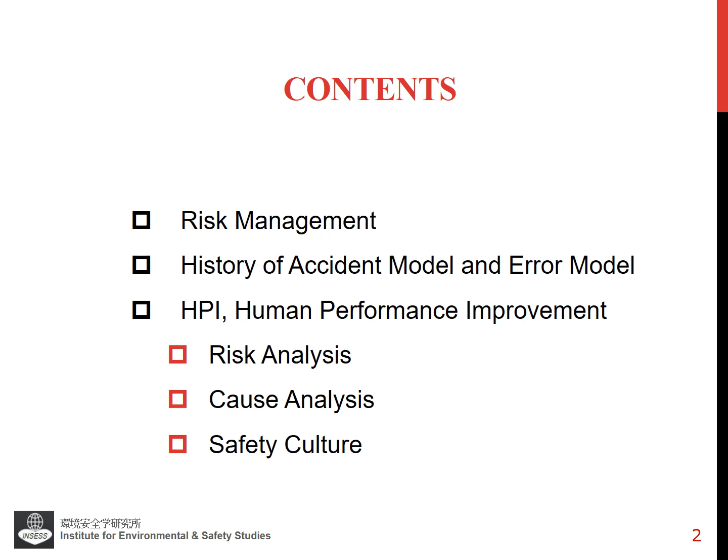What is risk management? An inflexible or unchangeable organization is clearly supposed to include fatal risk in the system and the current highly and fast developing situation, no matter what its size is. It means that any system doesn't reach the best result whatever behavior is done, being not adjustable for risk reduction due to variety and change in the system design or the organization decision making.

Namely, the key for the most rational optimization along with keeping the development is actualized by using risk management adjustable to all organizations or systems, to solve the complicated issues in the current fast-changing international situation. The point of risk is that local optimization would make the entire worst of the system. Well-balanced design and operations are required.

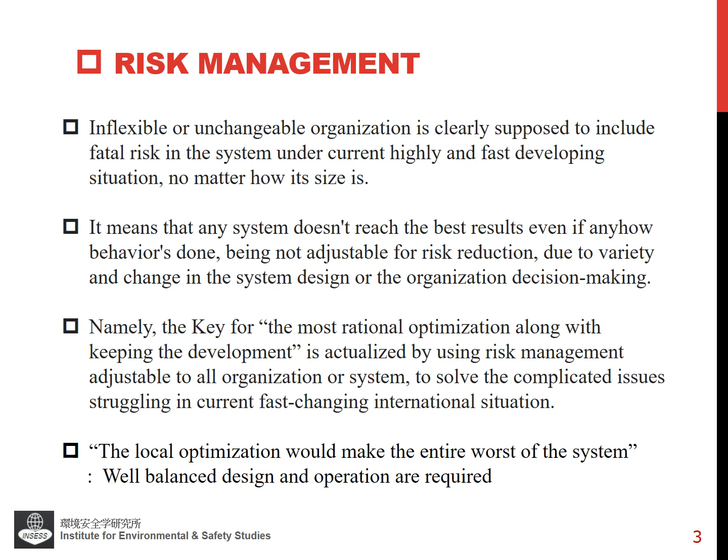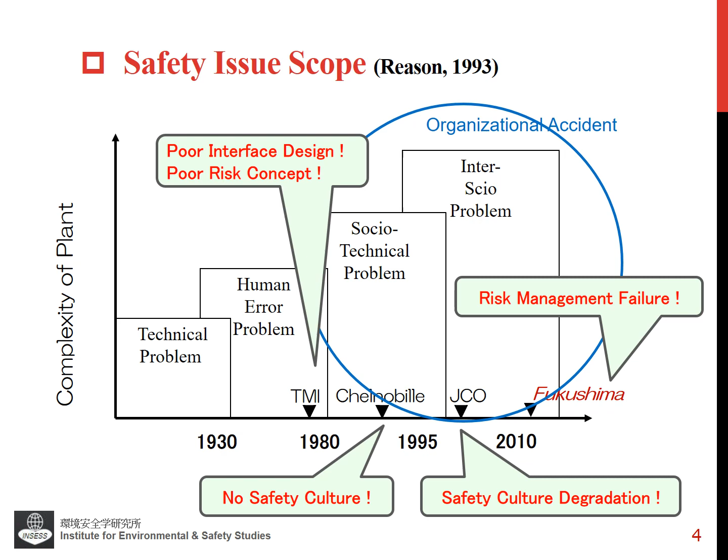Safety issue scope is shown here. As time passed, the plant system became larger and more complex, and the problems are completely different as time passed. The problem first caused on plant systems was technical problems from 1930 onwards, and then the problems moved to human error problems, and then socio-technical problems and inter-social problems had been actualized. So right now, we must consider the organizational accident.

This shows the accident scope change as time passed. Accident models and error models would change as time passed. The first recognized accident model is the so-called domino model or chain model. This is the basic one in accident models. We can do cause analysis. So the management countermeasure is encapsulation, seek and destroy. This is based on the cause analysis and also a very simple method used for this.

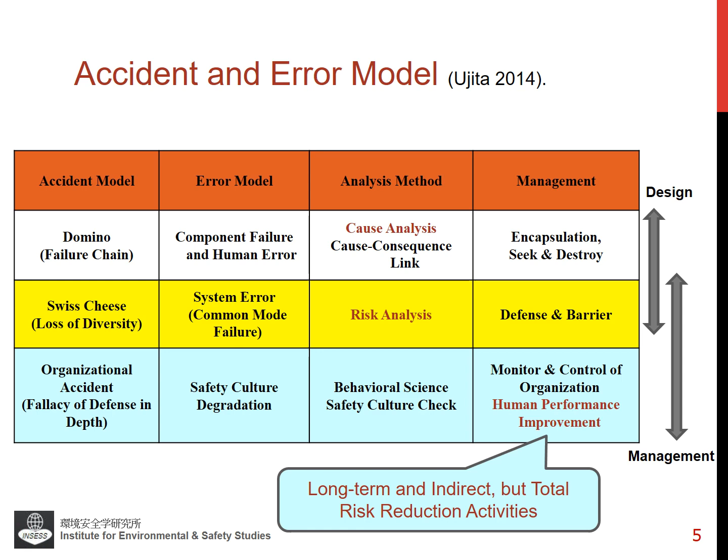The next one is a completely different problem, which is loss of diversity, as you know as the Swiss cheese model. We must consider common mode failure. The risk analysis countermeasure is defense and barrier. The third problem is a much more complicated one, namely organizational accident. This is equal to the fallacy of defense in depth. Defense in depth is a safety design principle. As an error in management, we must consider safety culture.

Then the next page's theme is human performance improvement for risk management. As we say, 80% are caused by human factors. At present, the existing huge complex systems have been reduced in hardware risk through hardware countermeasures and quality assurance activities based on safety logic. So the remaining risk can be said to be events involving human factors. For this reason, risk reduction activities can be described as human performance improvement activities.

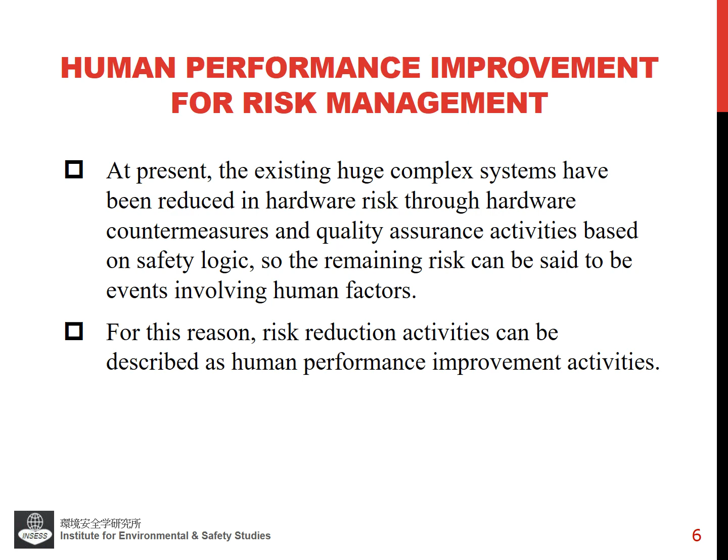I would like to comment on human performance improvement. HPI, human performance improvement, is a risk management activity to reduce risk due to human behavior in the system by understanding and optimizing human characteristics using risk analysis and cause analysis. HPI means creating the environment and context where human abilities can be maximized, such as affordance, nudge, and so on.

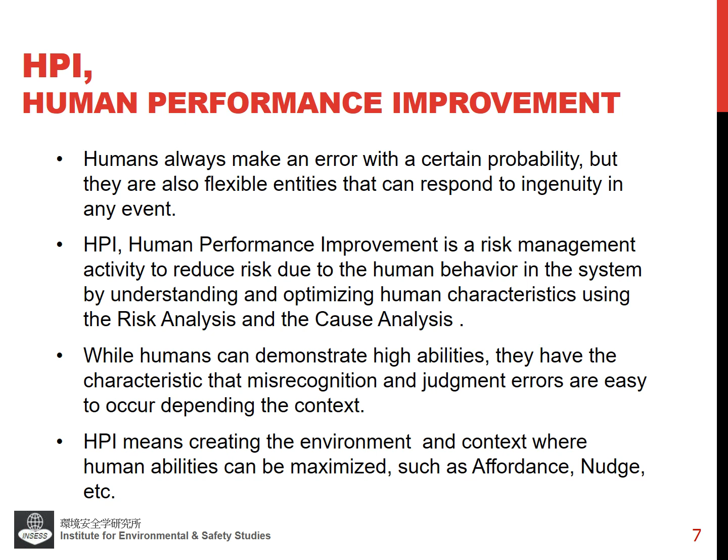As you can see on this slide, traditional human factor perspectives are listed on the left side. We consider that risk management is added to the human factor perspectives in human performance improvement. In a nutshell, total optimization or long-term optimization are the purpose of HPI, and another characteristic is not physiological or psychological, but judgment ability, that is cognitive characteristics, the most important feature existing in humans. So environmental context is considered to improve human performance.

That's why human performance improvement contains risk management and environment and context. We clearly consider that HPI is included as a part of risk management activities. The points are both prediction and optimization. We point out clearly that these 2 points are not included in human factors. Here is the most different part from human factors.

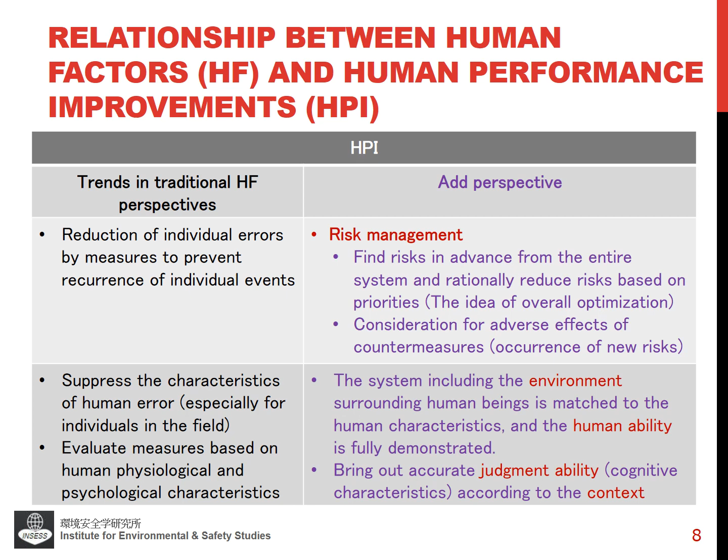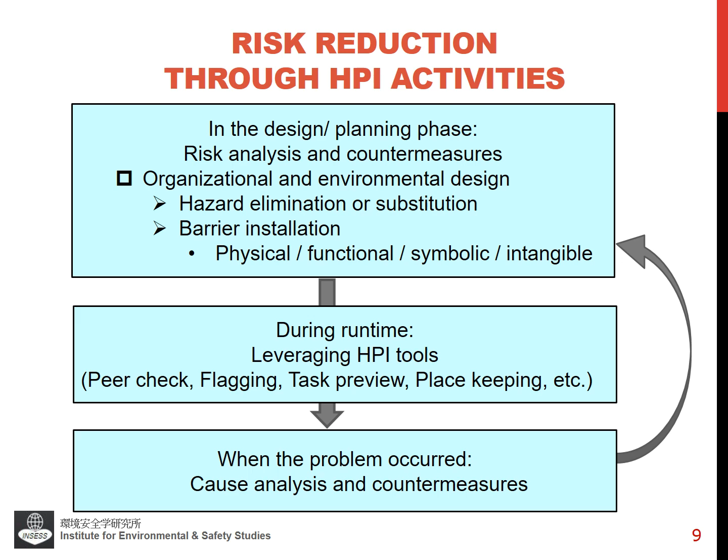Then, risk reduction is taken during runtime, such as peer check, flagging, task preview, placekeeping, and so on. This reduction is also important. And finally, tackling measures when problems occur are cause analysis and countermeasures. These are indispensable whether the problem is a design problem or an organizational problem. We must feed them back to the planning phase. These cycles for risk reduction in HPI activities should be completed fluently.

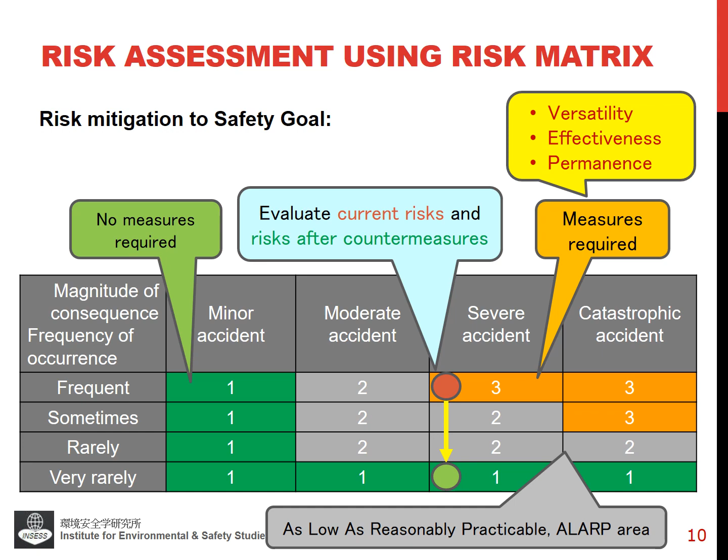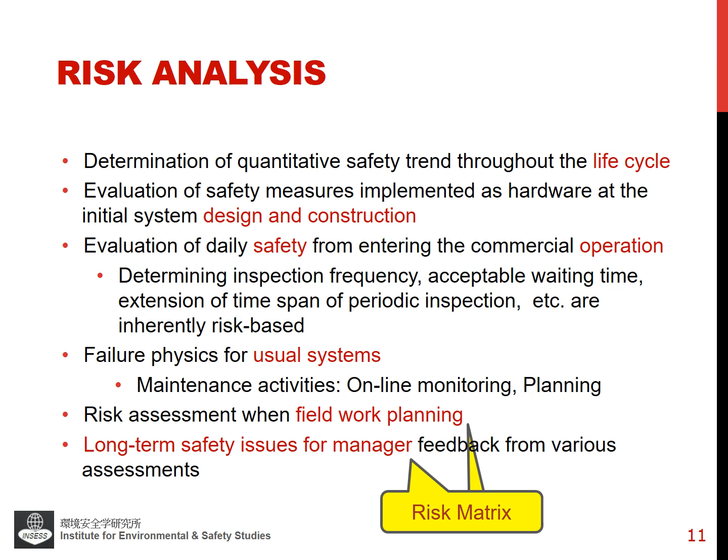We think all of you know this matrix well. The point of risk assessment is that it is most required to judge using quantitative concepts. We will explain risk analysis and cause analysis. Design phase and operation plan are indispensable for risk analysis.

The cause analysis flow is here. 1. Necessity and level of root cause analysis. 2. Understanding events, documents, interviews, and so on. 3. Event organization. 4. Causal organization. 5. Completion of causal relationship and estimation of root cause. And 6. Planning of measures and evaluation of effectiveness. Number 2 to number 5 are the analysis flow, and number 1 and number 6 are the risk matrix, as we have shown. Number 6 is the most important thing.

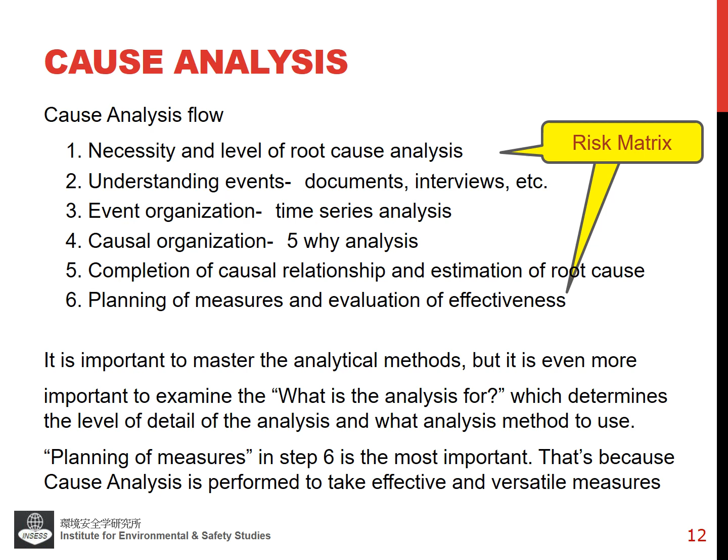It is important to master the analytical methods, but it is even more important to examine the "What is the analysis for?", which determines the level of detail of the analysis and what analysis method to use. Planning of measures in step 6 is most important. That is because cause analysis is performed to take effective and versatile measures.

Organizational cultures have 3 layers. The third layer is control activities, and accumulation of activity would change the third layer. Therefore, these activities make a spiral movement. To tell the truth, the defense in depth fallacy causes a negative spiral. We want to change it into a positive one. To cause this change, we believe that HPI continuity will be actualized.

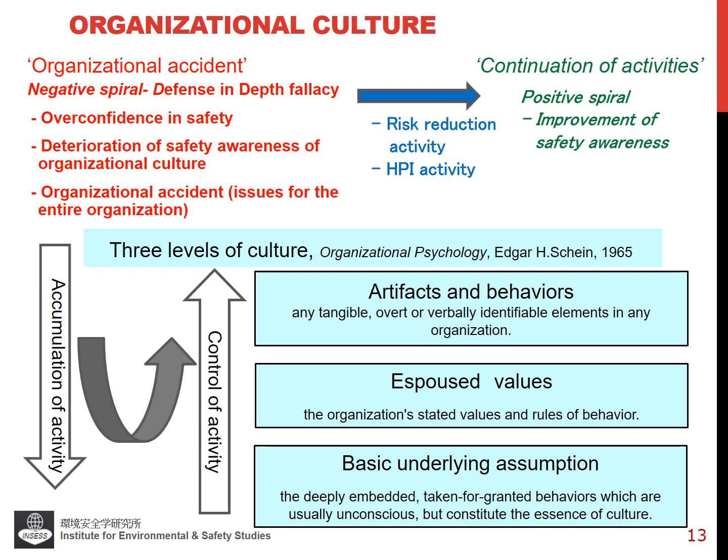Conclusions. Risk reduction measures that take HPI into account include a risk analysis that predicts and takes countermeasures to prevent future risks, and a cause analysis that analyzes and provides feedback on errors to prevent recurrences of past errors. That is, risk analysis and cause analysis are two fields to drive risk reduction and human performance improvement in huge and complex systems.